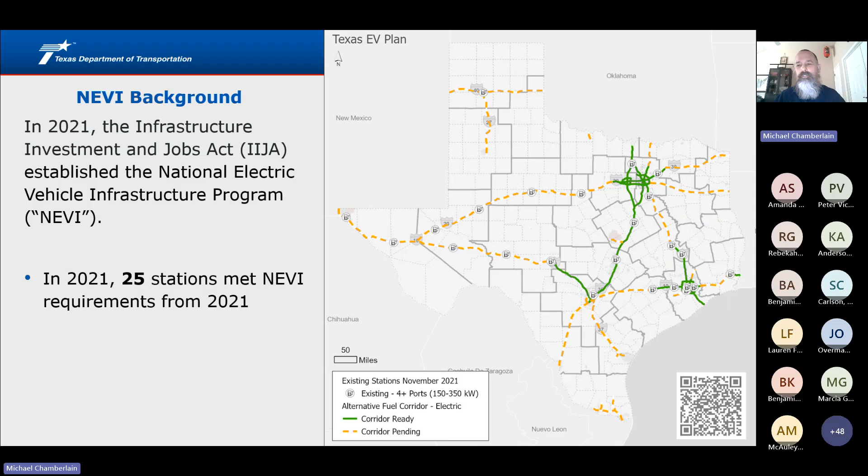Everybody knows that came about in 2021 as part of the Infrastructure Investment and Jobs Act. Pay close attention to the map on the right side of the screen. In 2021, there were 25 stations that met the NEVI requirements. That was 4 years ago. It seems like an eternity ago, but it was only 4 years ago, almost 4 years. So look at the map closely, I'm going to change it.

That's where we are today. So on the phase 1 alternative fuel corridors, the electric alternative fuel corridors, there are 478 stations that now meet the NEVI requirements. So let's look at that again.

2021, 2025. So we have a subset of those stations. We had 82 on the alternative fuel corridors, electric alternative fuel corridors. 29 of those are currently under construction. The red dots are under construction - they'll be finished later this year, first quarter of next year. The blue dots are actually open, and the purple dots will be open by the end of the summer.

53 of our stations are still currently paused at the federal highway level. They made it to the step in the process, but they did not get through that, so we're waiting for some new guidance, hopefully soon. But again, I want to focus on this - this is 2021, this is 2025. So 478 new stations that meet those federal requirements, at least 4 ports, 150 kilowatts per port.

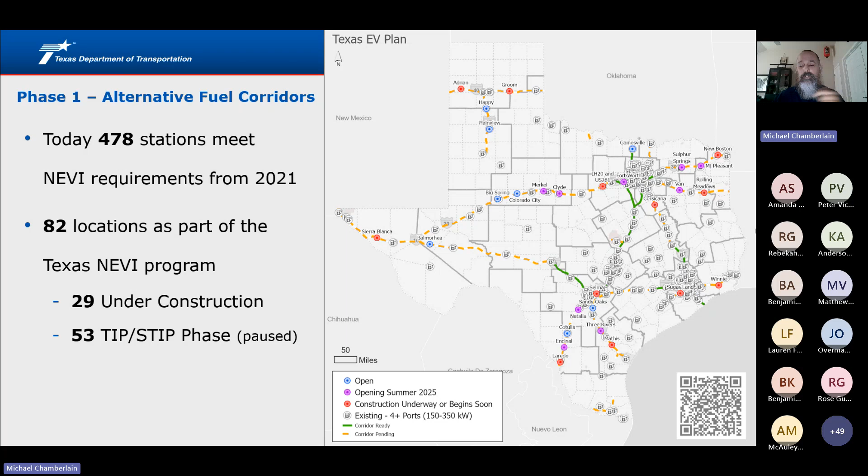This is my favorite slide, the trend slide. Texas is adding about 2,000 EVs per week. Sometimes it's more, sometimes it's less. It's been as high as 9,000 per week. I think it was 1,900 last week.

Battery manufacturing capacity is estimated at 1,100 gigawatt hours by 2027. That number is starting to come down a little bit with the changes happening at the federal level - we think it will still come down some more. But as stated, that's enough battery capacity for 14 million EVs per year by 2027, which is an enormous amount of capacity. Put that into context, U.S. sales of all types was 15.9 million in 2024, of which about 3 million of those were battery electric, plug-in hybrid, or mild hybrid. Peak internal combustion engine only sales was in 2017 at 17 million. So that delta, that change in 3 million, that's the electrification that we're tracking.

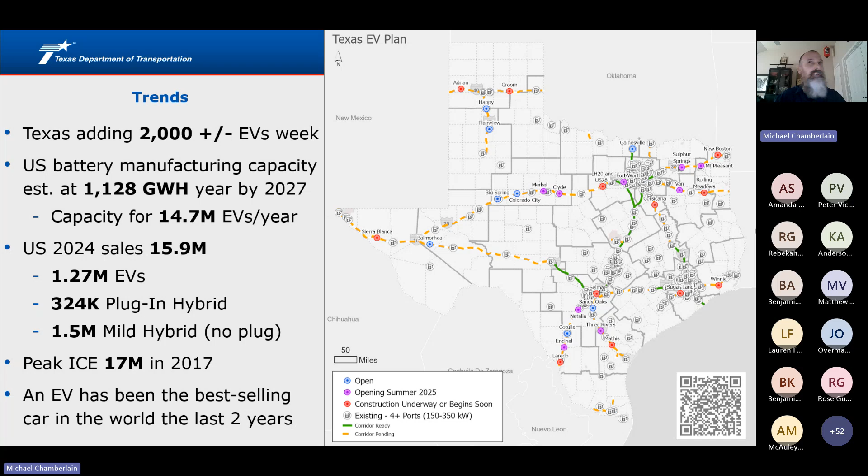Another just interesting note, an EV has been the best-selling car in the world for the last 2 years, and it may maybe make it this year, maybe not. BYD is a Chinese manufacturer. They make it in there. Where will the batteries be made?

Just quick on electrification and fuel source. Texas is #1 in utility solar, we're #1 in wind, and we'll be #1 in power storage soon. I just picked a date on June 2nd, like 10 about now during the day, and it was 63.4% zero carbon with renewables hitting real hard. This has changed - I know it's variable, it could be 60% natural gas tomorrow, that's just what it is. But I put this up there so people can see that it actually is happening.

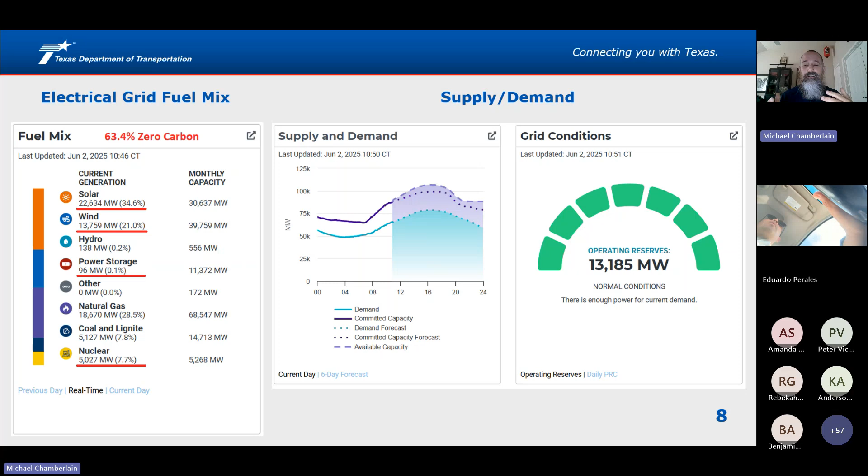And on the right side, the one I put on - 13,185 megawatts of free electricity in the grid, that's half the capacity of California. So half the demand of California. So Texas at this time was producing enough electricity to power half of California. So I just put that out there.

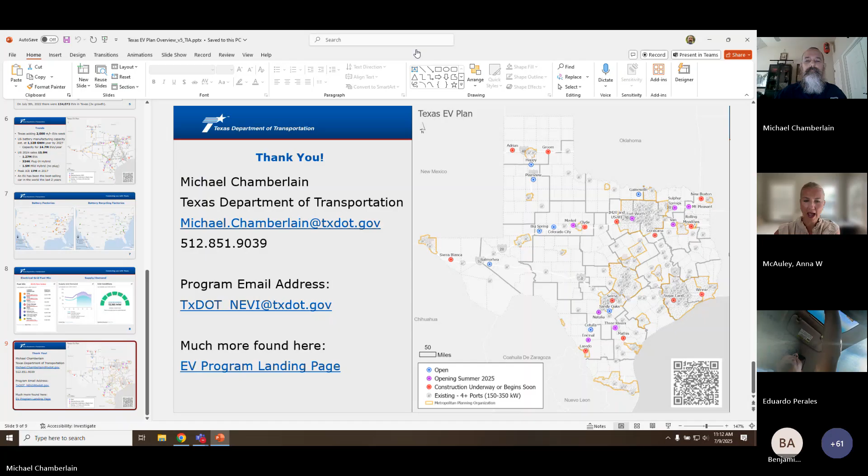Thank you, Michael, that was great. I love the graphics, and the SEC Big Ten analogy is an easy one to remember, so I can see why it's popular. Nine times out of 10, SEC is everyone's favorite conference.

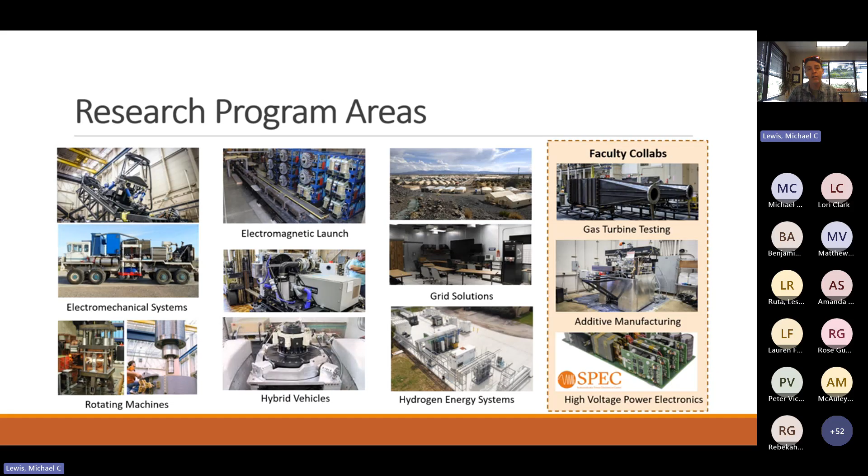One of our core expertise areas is in electric machines, motors, generators, flywheel energy storage systems. We also have a big grid solutions program, so how do we do large scale grids, microgrids? How do we identify faults and mitigate those and put sensors on networks and so forth? But hydrogen is also a big focus, and there are a few different areas where we are hosting different faculty and some of their research that are listed on the rightmost column.

I think what sets us apart from most university research groups and centers and organizations are the facilities that we are provided by the university. For one, we're on the Pickle Research Campus. It's close to 500 acres of dedicated research space that hosts a number of different research centers and organizations like ours.

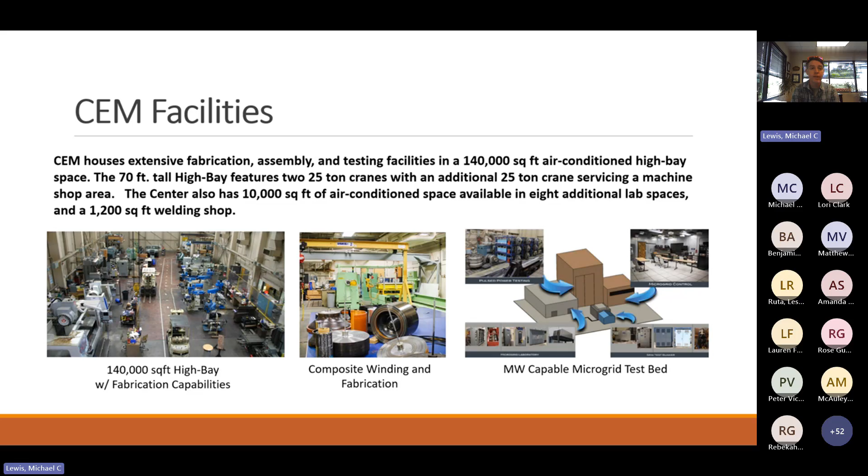At our facility, we have a large machine shop, a large high bay facility, and space to do large scale experiments and research. There are 25-ton cranes throughout our high bay, so we can do really big things. We even have capabilities of winding composites, and we have a megawatt capable microgrid facility. More recently, we built a new hydrogen research facility, which is what the rest of this presentation will focus on.

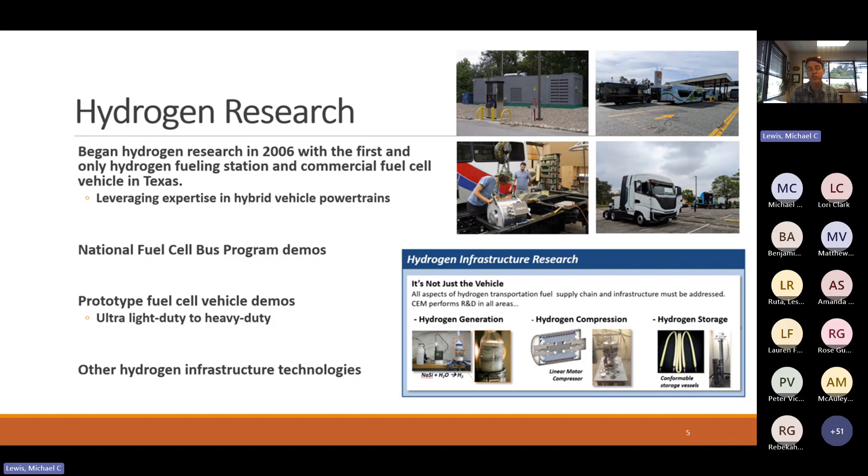Over the years, we've done a number of things focused on hydrogen fuel cell vehicles, different demonstrations with buses, and building up other first-of-their-kind vehicles. We also found ourselves getting into adjacent hydrogen technologies, such as storage tanks and compression, and more or less traditional hydrogen generation mechanisms. So we've done a lot, all leading to where we are today.

A little bit more about one of those vehicle projects. This was a very successful project for us, though at the end of the day, the vehicles and the hydrogen fueling station availability in California didn't lead to a lot of success, just because we had a hard time getting hydrogen. This was a project where we collaborated with the Department of Energy and private industry. We brought in student interns to build these first-of-a-kind prototype vehicles. Some of those interns went on to work for the private company, where they built 15 more of these vans in phase 2.

So it really touched all parts of what we try to do at the center, whether it's research and doing a first-of-a-kind system, educating students, or getting the technology and know-how out into the marketplace. A very cool project that went on for a number of years, but it wrapped up this past December, largely because the hydrogen fueling stations and availability of hydrogen in California was pretty limited. It was costly, problematic, and UPS just got tired of dealing with it, to be honest with you.

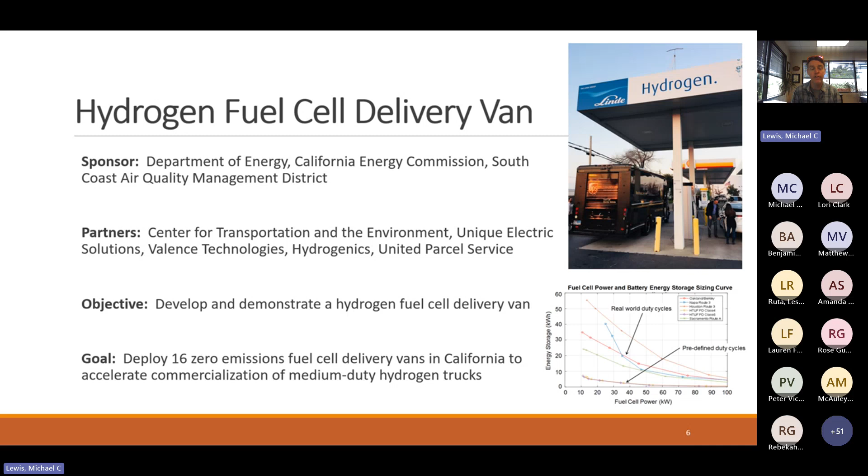Moving on, where we are today is we have in place a new hydrogen R&D facility that was part of our H2 at Scale demonstration project with the Department of Energy. Here we built out this hydrogen facility and also built out a model to understand how you would deploy hydrogen infrastructure in Texas in the future, and wrote a framework and strategic report around that.

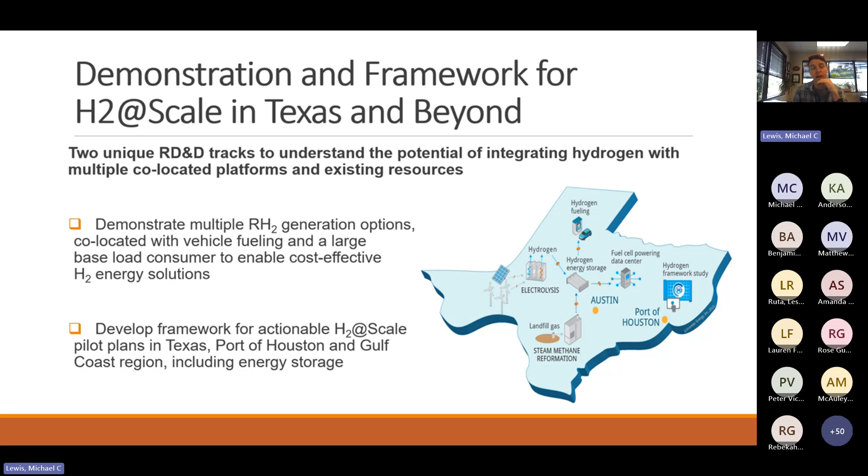That hydrogen facility—we'll get to that in a minute. Here's a little background: we started the project in July of 2020, and we'll be wrapping it up this year. We actually have an extension request through the end of this year, not July '25. The project includes a number of industry partners, which you can read here for yourselves, but effectively it includes someone from just about every point in the supply chain or value chain when it comes to hydrogen.

The Proto Hub is shown here—this is what we built under the project, our demonstration site. It's a first-of-a-kind hydrogen research and development facility that includes hydrogen generation from renewable natural gas using a steam methane reformer, and hydrogen generation from electrolysis of water using emulated wind and solar power profiles so we're producing it in a renewable fashion. There's hydrogen storage, compression, and distribution on site. We have hydrogen vehicle fueling capability at 350 bar and 700 bar, and we actually have a few Toyota Mirais as part of the project—you can see them in the background here, a blue car and a red car. Lastly, we have a stationary fuel cell on site creating power from hydrogen, which powers our computing center on campus.

There are some specs here about the system, but roughly combined, we're closer to 80 kilograms total per day, where the steam methane reformer today is not producing 80 kilograms per day. It's closer to 40. So combined between the reformer and our electrolyzers, we're producing about 80 kilograms per day. For context, that's roughly what we're looking at putting on a Class 8 truck today.

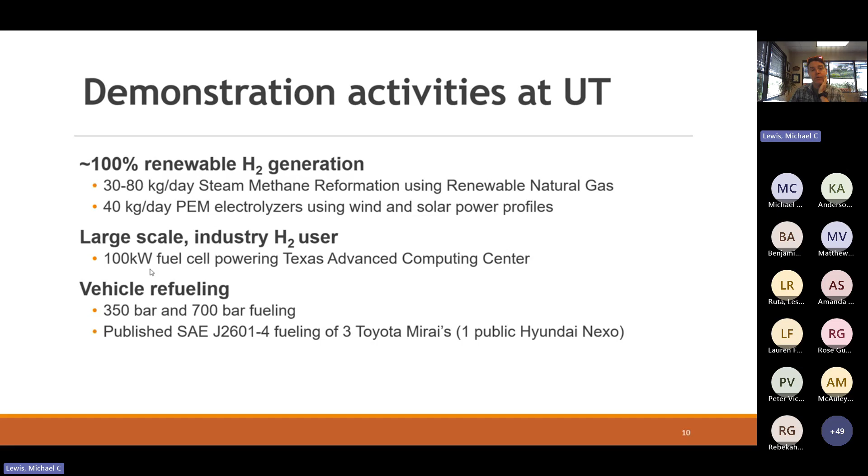Our fuel cell outputs a peak power rating of 100 kilowatts. And as I mentioned, we have 350 bar and 700 bar fueling.

On the infrastructure deployment side, the model we built is called HOWDI. It stands for Hydrogen Optimization with Deployment of Infrastructure. This model was used to study how hydrogen infrastructure might grow throughout the state of Texas as we think about different policies or scenarios that might be in play.

Do we care about carbon? Do we not care about it? Is there a tax credit for hydrogen? Is there not? So forth. Or is it only electrolytic hydrogen and nothing else, or do we have the ability to do SMR with carbon capture, for example?

But this model informed a framework and strategic plan for deploying hydrogen infrastructure in Texas that we have available on our website. I'm happy to share that with the audience at a later date. Send me an email or what have you. Maybe I'll share a version of this presentation that actually has a link to that report when it's all said and done.

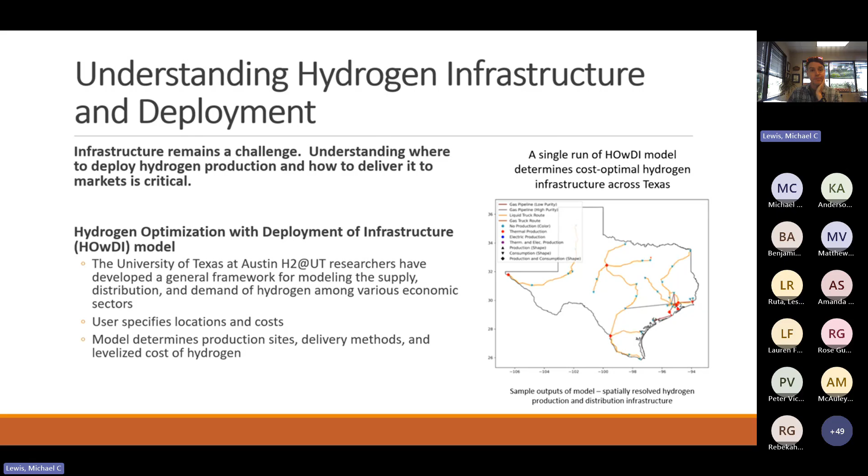The HOWDI model, I wanted to point out, did not end with the Hydrogen at Scale project. It's actually now being used on the H2LA project, which is developing a hydrogen corridor between Houston and Los Angeles. Even though the focus here is I-10 in these graphics, that corridor has really expanded throughout much of the Southwest. It includes I-40 and I-20 and a lot of the other interconnecting routes. And then, of course, the Texas Triangle is part of that.

We're using the HOWDI model to help inform how we would deliver hydrogen to fueling stations throughout that region. A lot of modeling is being done by Oak Ridge National Labs to understand the truck traffic patterns and where we need stations and how big those stations might be. And then we're using HOWDI to understand, well, where can we make the hydrogen? How do we deliver it to the stations? How do we reduce the cost of all that?

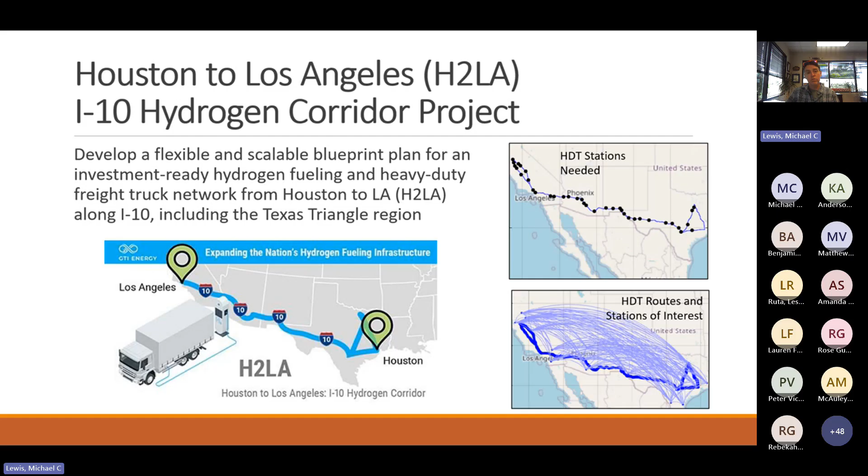So I think this is going to be very informative. It might help out with some planning activities for hydrogen fueling stations in the future within Texas and across the country. We're actually getting a lot of interest from fleets all over the country wanting us to use this model and approach in their region.

But looking to the future, with the Hydrogen Proto Hub, that's the facility I showed earlier, we are rebranding it as the Proto Hub in the midst of that, getting away from the one-off H2 at Scale project. We think there's a great future for using that site as a proving ground for emerging hydrogen technologies. That could be any part of that value chain or supply chain, making hydrogen, distributing it, using it, whatever the case might be.

We have ongoing projects that are going to start blending hydrogen with natural gas on the campus. We are adding a capability to the site to emit hydrogen at a known quantity, so for those companies and groups who are developing hydrogen emission sensors for environmental reasons, we'll have a place to come test those. We've had interest from vendors wanting to prove out e-fuels or ammonia production systems as well. But a lot of potential for the site to really help with those valley of death type technology adoption curves and really proving out hydrogen.

Also, we think there's going to be a big opportunity for the site to help contribute to training, education, and workforce development in the future. We do tours almost on a weekly basis at the site. Anybody on the call is welcome to reach out to me if you would like to come check it out. But as we're moving forward, we think those tours are going to start becoming more focused and developing educational and training curriculum.

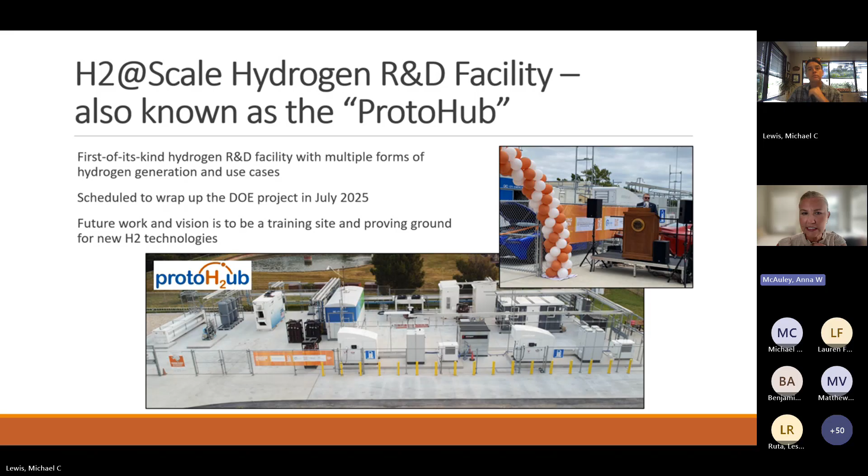Mike's presentation and discussion reminded me of a story from some folks at Toyota. A couple of years ago, they had a Class 8 truck at the Port of LA, and they wanted to showcase it in Texas, but there were no fueling stations, so they would fly it to Texas, drive it around a while, and then fly it back to LA to fuel up. I think those days are behind us soon enough, but we'll hear more from Jared now about heavy duty fueling and what COG is doing.

Yeah, thanks, Anna. I'm Jared Wright, senior planner at the North Central Texas Council of Governments. We are the regional planning agency for the DFW area and also the Metropolitan Planning Organization. We also host the Dallas-Fort Worth Clean Cities and Communities Coalition. Today I'll be giving an update on our Charging and Fueling Infrastructure Corridor Award.

We were awarded 2 projects under the first round of the CFI program from Federal Highway Administration, and this is focusing on our corridor award for hydrogen refueling.

So I mentioned we are the regional planning agency for the DFW area, and you'll see on the map here that we have a project that encompasses the entire Texas Triangle. We did something a bit unusual with this program - we applied to build hydrogen refueling for the entire Texas Triangle, building on a planning study we did back in 2022 that showed you need a full network of hydrogen refueling stations, to the point Michael was bringing up, to really have refueling at each point of the triangle and enable freight to move throughout the entire region of Texas and refuel with hydrogen.

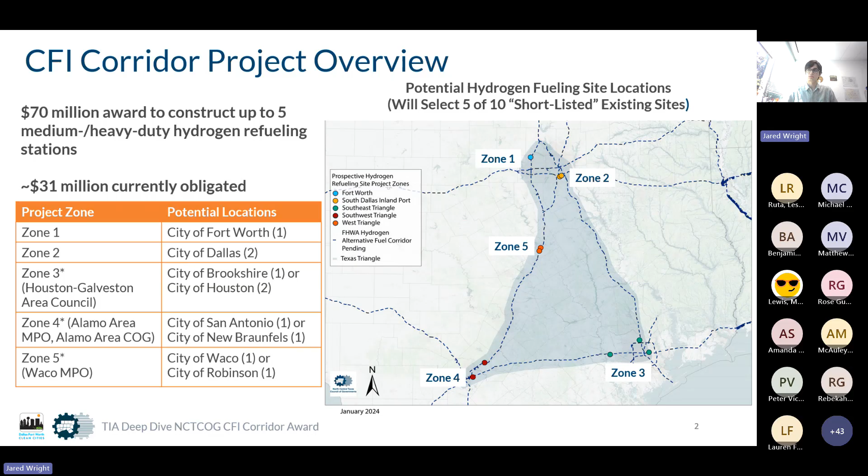And there's a bit of a journey there to, one, negotiate contracts with the Federal Highway Administration, but also get Transportation Improvement Program, or TIP, listings for the $31 million I mentioned to get that obligated. During that time, we also received National Environmental Policy Act categorical exclusions for all locations from TxDOT, because we specified these would be at existing truck stops, not disturbing any undisturbed ground or vegetation. These would be at already existing truck stops where there's already concrete and existing fueling sites. That allowed us to enter a contract with Federal Highway Administration in December of last year, so we were able to get that obligation of $31 million and continue to move forward with the project.

We've still been working on projects since then, and just last month we were able to execute that agreement with the station developer we partnered with for their call for partners that will be building out these stations.

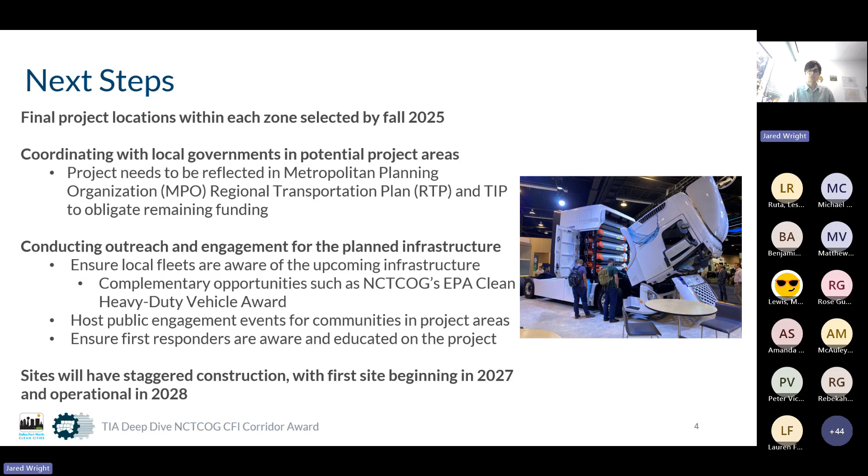These sites will all have staggered construction. There are 5 hydrogen refueling stations, and we don't expect they'll all be built at the same time. It'll be staggered, with one going first, maybe a couple simultaneously, then slowly building out the rest. We don't expect construction to begin until 2027, and then operational in 2028, to allow time for fleets to be ready, start adopting these vehicles, and place orders so they already have the infrastructure in place to refuel these hydrogen vehicles. That's everything I had.

Available for any questions.

Thank you, Jared, that's great info. I'm glad to know this effort is still moving forward, and it's really cool to see the work Mike is doing and others we've heard from, and how this all ties together. We have some time for questions — if folks have questions for Jared, feel free to drop them in the chat or come off mute.

I had two questions, Jared — I may have missed this, apologies if so. Can you share what sorts of locations you're looking at for the charging facilities? Is it city-owned, publicly owned, or what's the strategy there?

Yes, these will all be privately owned at existing truck stop locations, with the station developer we partnered with. These will be added onto those truck stops, adding a couple lanes for hydrogen refueling. Okay, gotcha, that's helpful, thank you.

And then the other question I had — for any of the COG area or partners you're working with, like Waco and those areas, are they looking at fleet transitions? I know trash trucks are kind of the heavy duty stuff, and there are grants to transition those. Have you all been coordinating any of that in the DFW area?

We've been making sure our local fleets up here are aware, the ones we think could be interested in hydrogen, especially transit vehicles - we see this as a great opportunity for them. The station locations really didn't make sense before, but these could provide a chance for them to start dipping their toe in the water. We've been in contact with local fleets in our region that we think may be interested, but no concrete plans yet. There's still a few years before these stations are fully built.